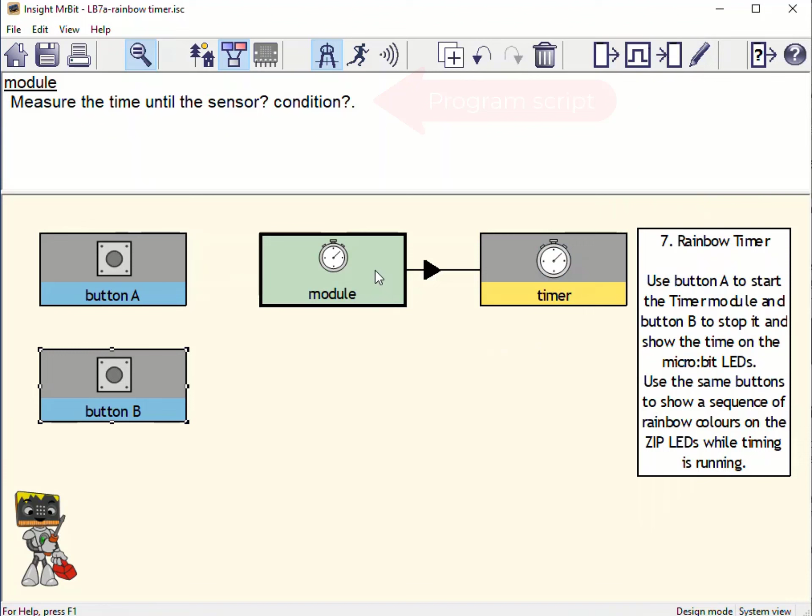We begin in design mode by selecting two buttons from the Inputs menu and a timer from the Control Modules menu. The program script for the module appears in this panel. We shall measure time to 1 decimal place and give the module a label.

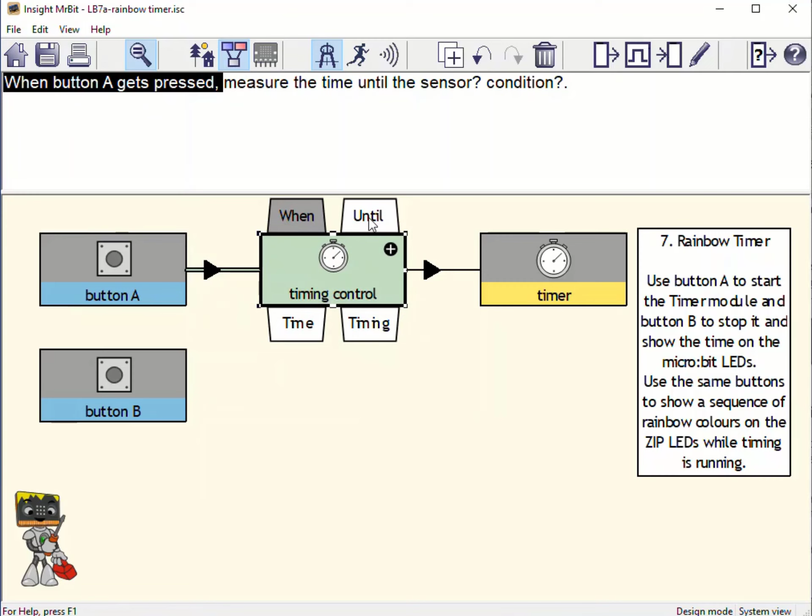To make the module start timing when button A gets pressed, drag a link from the When tab to the button and set the condition to Gets Pressed. Similarly, to stop timing with button B, drag a link from the Until tab to button B and set the condition to Gets Pressed. The yellow box shows the time value as a variable.

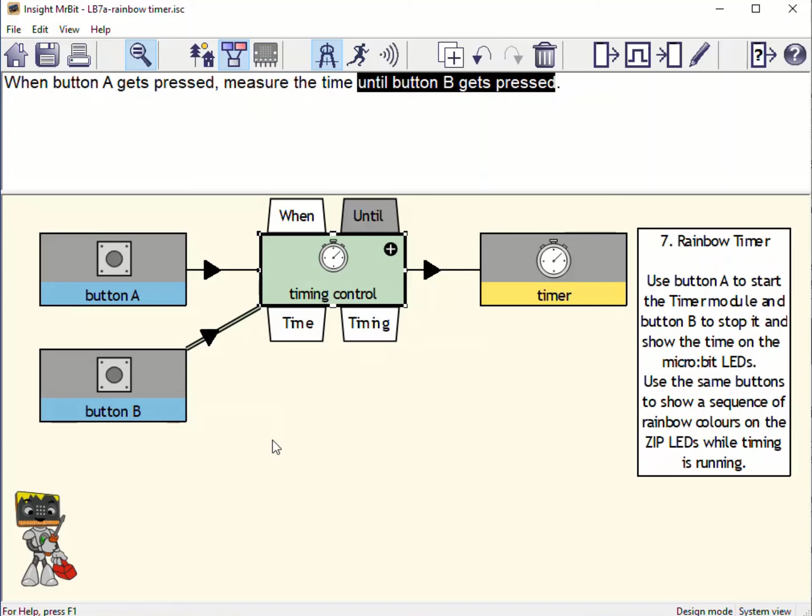When timing is finished, we want to show the result on the microbit LEDs. For this, we need to add an instruction and select the LEDs. Drag a link from the Outputs tab to the LEDs and select the display type for showing a number. The number we want is the value of the timer variable, which we choose like this.

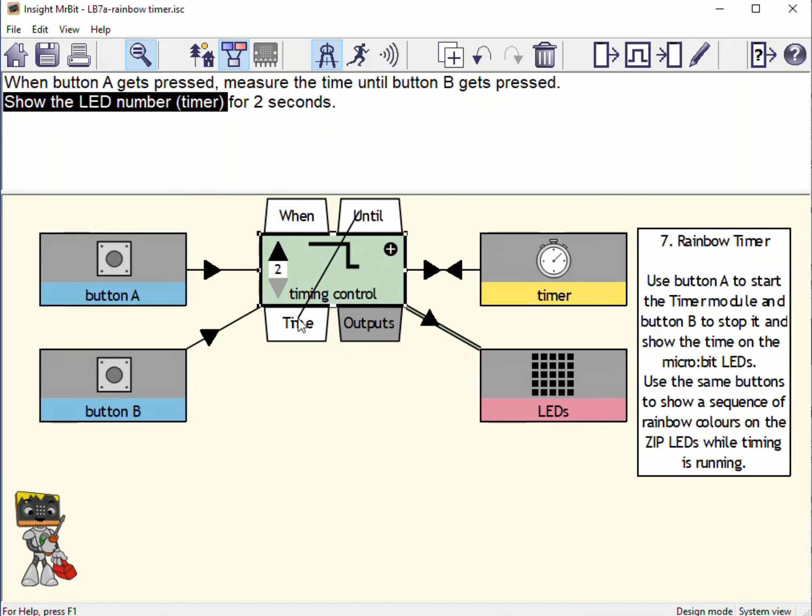By default, the number shows for 2 seconds, but we can adjust this after dragging a line from the Until tab to the Time tab. Let's see how all this works in run mode. Press A to start, B to stop, and the result shows on the LEDs.

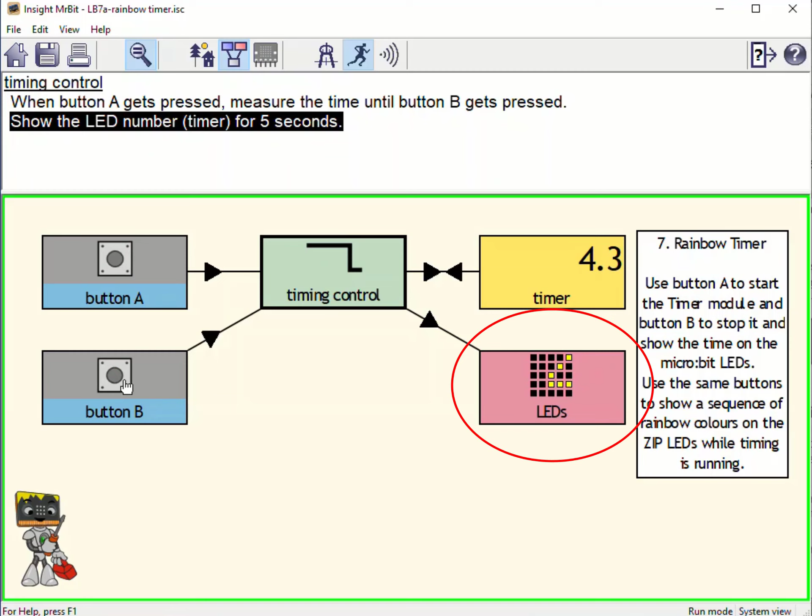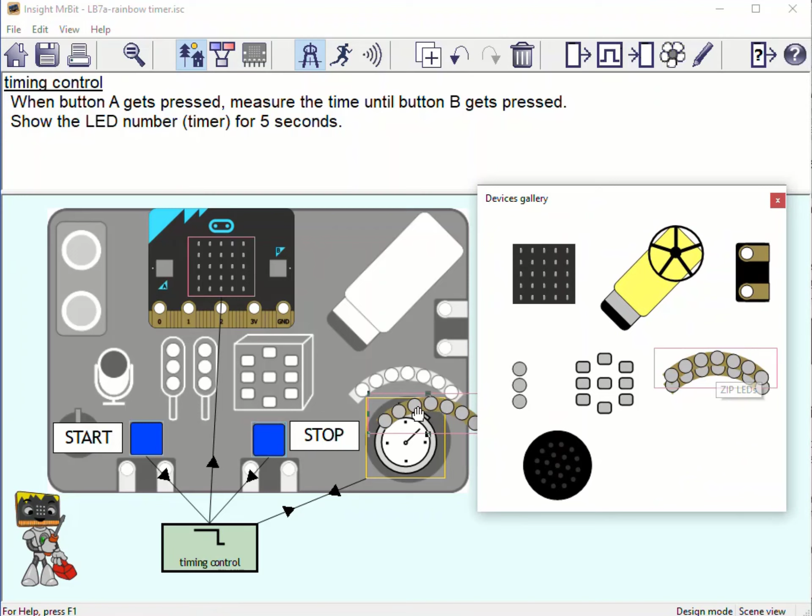Back to design mode, we are going to use the zip LEDs to show when timing is in progress. So we switch to the scene view and select the LEDs from the Devices gallery. We also select a signal control module so that we can control the LEDs. Let's give it a label. Drag a link from the Outputs tab to the LEDs.

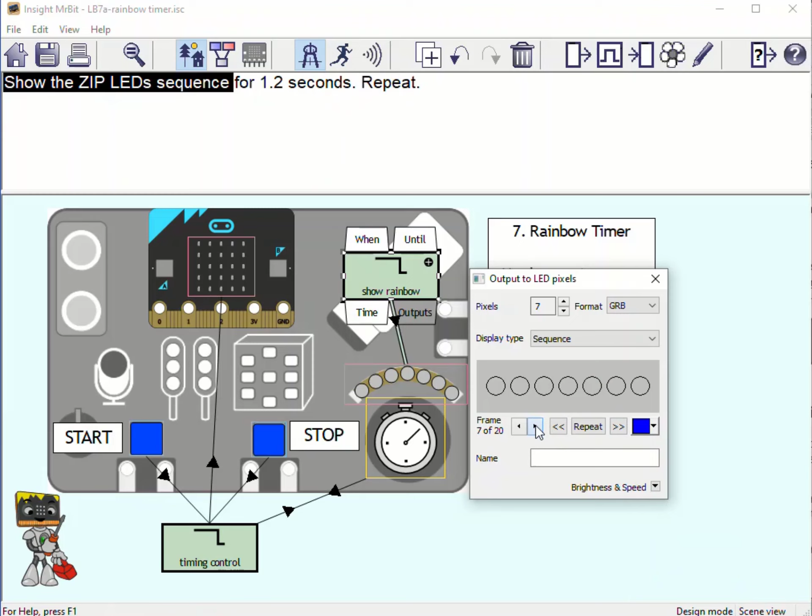While the timer is running, we shall show a sequence of the 7 spectrum colors. It works like an animation with 7 frames. Let's start with red for the first frame, then orange for the second, yellow for the third, and so on. A different color for each frame.

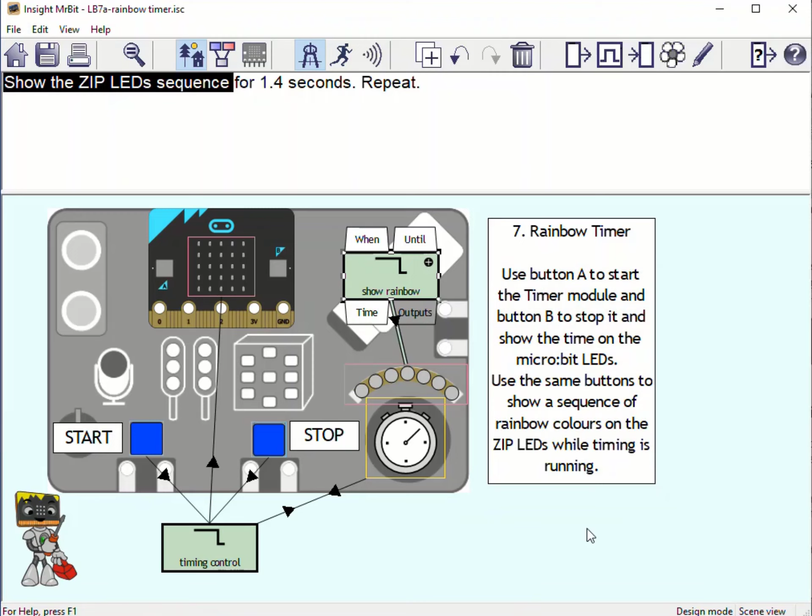Now it remains to start and stop the animation as we did for timing. Drag from When to button A, set the condition, drag from Until to button B, set the condition.

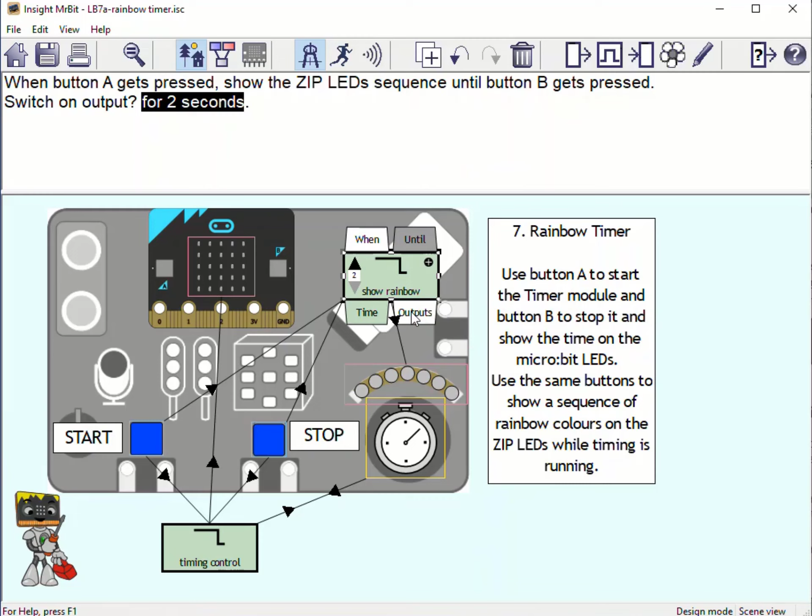To show that timing has finished, let's add an instruction to show all the colors together. Drag a link, choose the whole spectrum. As with the timer, we'll show this for 5 seconds.

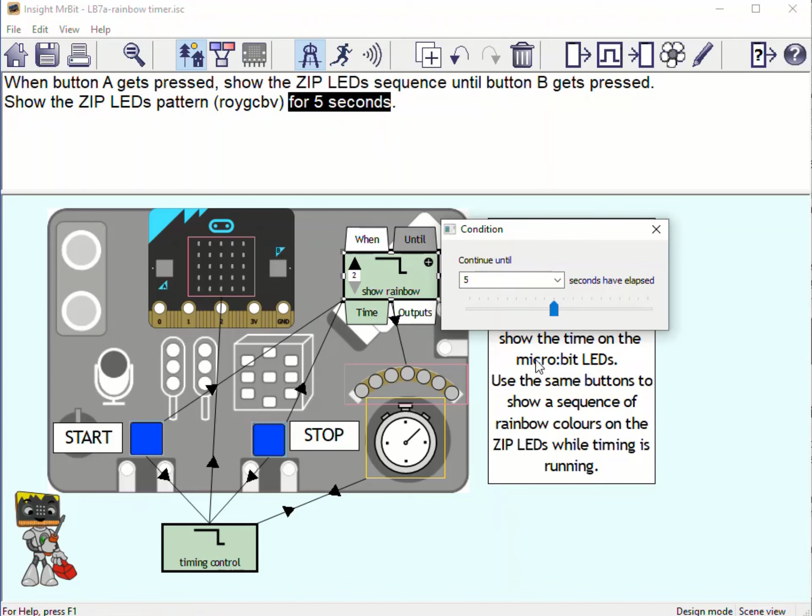The program script is now complete, and we can test how it works in run mode. Finally, we can send the program to the microbit.